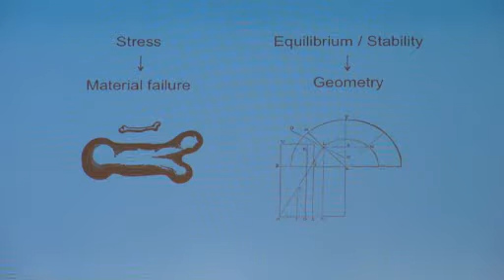The span is about 13 meters, and the thickness goes from 10 centimeters to 15 centimeters. If these numbers don't directly ring a bell, perhaps this image might. It's actually about the same thickness to span ratio as an eggshell, whatever the span is in an egg. Why am I talking about this? Because masonry structures are very different than our typical materials that we use. There's two extreme ways to look at structures and structural materials. One, you can design them for stress. That means you design them for material failure. That is our modern structures.

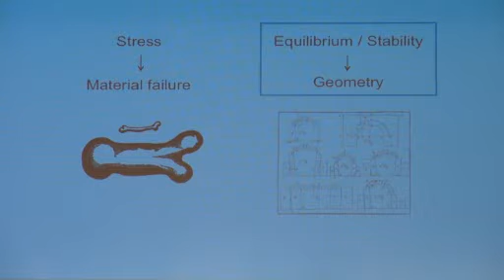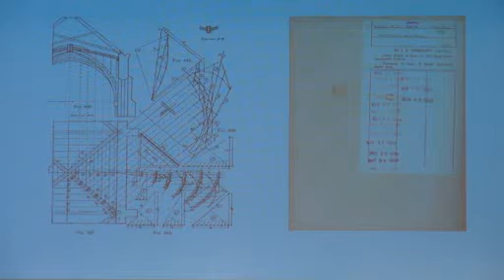But then actually the masonry structures fall in this next category. That is, they actually need to have a good form, because there is nothing holding them together other than just the compression of the flow of forces. So if they don't have a good form, then they will collapse. That is also why in the Middle Ages they did all these spectacular things. My introduction at MIT was here with this book by Wolff, and as you see, it was 42 years ago that anyone touched this book, so it's a very hot topic that I was doing there at MIT, right?

So, but we want to explain these things. Please bear with me. It will make sense why I'm looking at these things and how it fits within the urban stuff, right? But here, first we want to explain these very highly sophisticated shapes. So for this, as a follow-up of my PhD dissertation, we developed these tools that explain this. Okay, but this is digital. We already talked a little bit about digital. You can do whatever you want with digital, so that doesn't mean anything.

So we also do physical tests, and the reason is that it's a property of geometry and not of stress, so these little models actually act exactly the same as a larger structure.

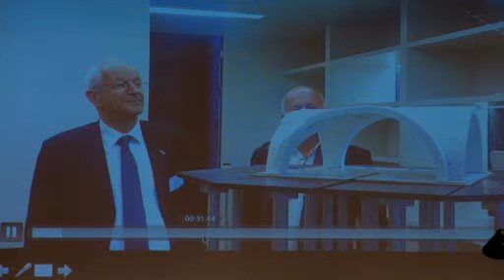Maybe you recognize two of the people on the screen there. That is the president and the vice president of research of ETH. I could catch them for a quick two-minute demo, and this is the result. They seem at least intrigued by what's going on.

What I'm doing is basically modeling and simulating displacements, what happens over time in historic structures. You see I'm sweating profusely because I was a little bit nervous. So that's what happens when you abuse masonry structures too much. They enjoyed it. Everyone loves destruction. Anyway, it was a great moment of fame.

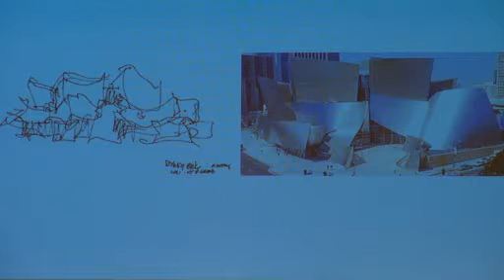Okay, so what is now the link? Unreinforced masonry structures need to have a good form just to stand, otherwise they would collapse. So if we understand this and we learn from these old master builders, the old designers, then we can design new, efficient and expressive structural form. So what does that mean? It's also related to the digital, but I would try to avoid doing it with a lot of material that is not necessary.

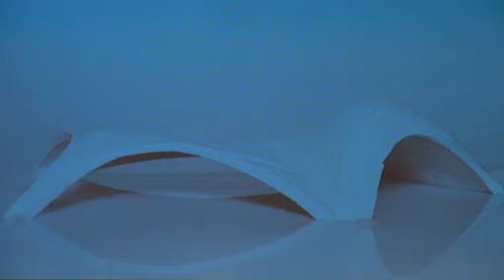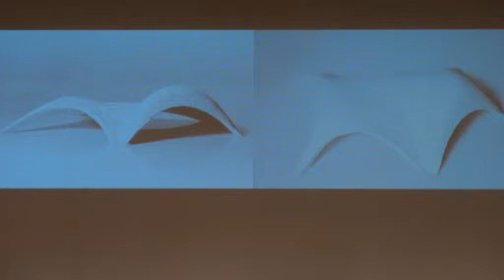So then we do things like this. Again, the little models: this stands without any glue. This was our first little test, and some parts are only 2 millimeters thick. The sound is not running, but that's okay. Again, you need to destroy everything. These models are very important, because part of this is educational, on how to transfer the kind of knowledge that the old masons had.

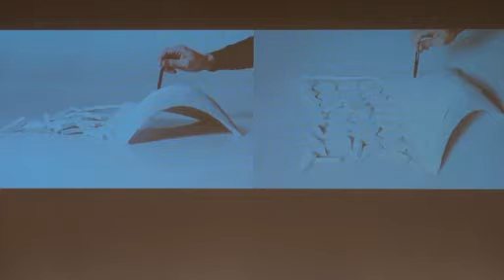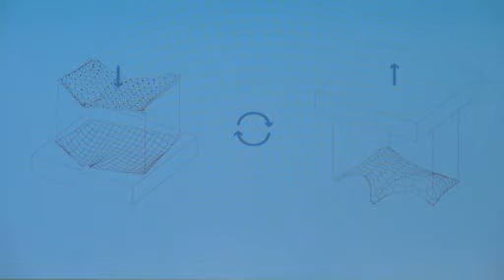You see that these vaults have a lot of capacity to stand. You see also that I'm not cheating with images, that it's really a structural thing, and it's stable until, of course, you do a little bit too much abuse. Anyway, collapsing things is pretty fun. If you wondered how we made this little cake form, we flip it over, it has the supports, and then it stands.

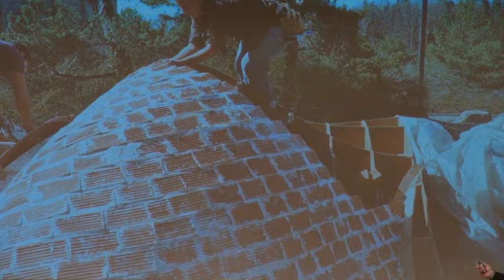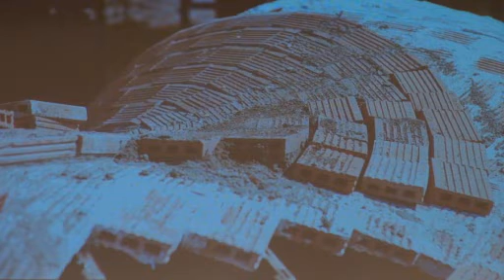So little scale models are fine, and this is getting towards why it becomes relevant. We try these new forms out there directly with traditional techniques. That's Lara Davis; she was a PhD student with me, and now she is with my colleague Dirk Hebel pushing these ideas further. This is built with no formwork, in space. So looking at the past you can do exciting things.

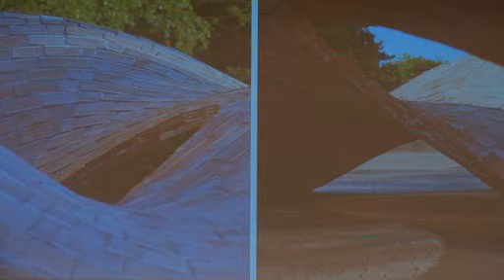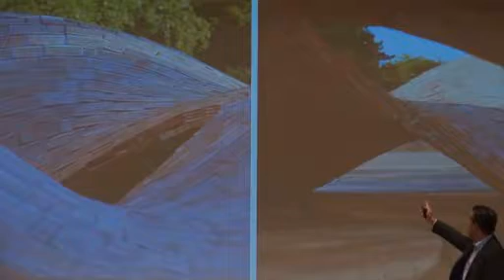This was a little showcase we did. It's not finished, but it shows the interest of understanding these master builders to do something that people do not assume can stand. For example, my colleagues in civil engineering insisted that there had to be tension everywhere. That is not possible, because there is no rebar in the structure.

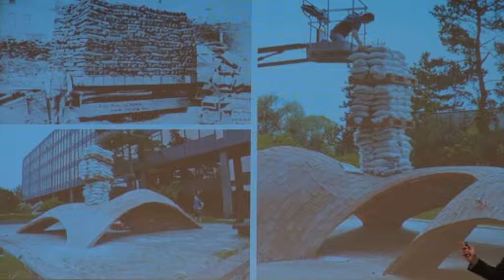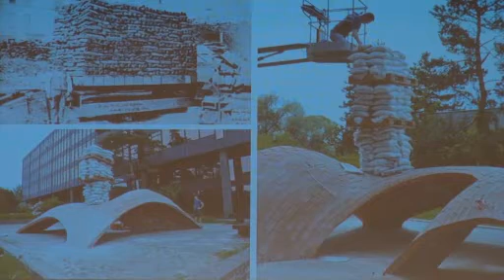To be taken seriously as potential master builders, we needed to do some ghetto testing, so that's why this highly precise Swiss testing situation is going on there. Unfortunately, nothing happened. We hoped for a spectacular collapse. You actually learn the most by making things fail rather than succeed. So we needed to do something else.

So Matthias made digital tools, and he was really excited. It was a good day. Keep going, keep going. That's my overly excited postdoc.

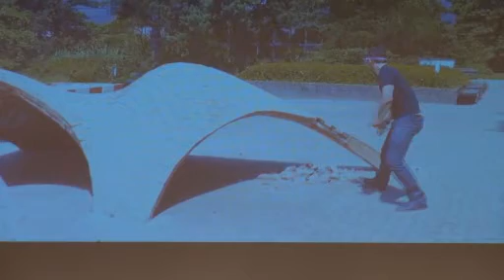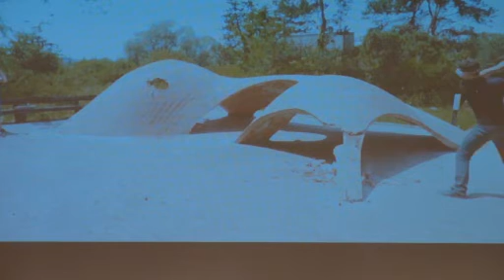You see, he's not used to handle these kind of heavier tools than a mouse, but. Wait. Well, it was an exciting day for all of us, right?

Okay, I will not explain why that is strange, but you get the picture, it had to come down. So the good thing is, again, we learned about this, and so we are really trying to translate this, and this is important.

All right, this is now important for the next thing, because of course you cannot just do all this innovation only digital on your computer. You need to have these grounds. That is the other thing. So I already said unreinforced masonry needs a good structural form to stand.

And then another aspect is not only that we can do new design applications, but if you have a good structural form, so basically you shape your structure where the forces want to go, then the stresses in the material are very low. And so that means that you can either build with very little or very low quality material. And so now we're getting there.

So this is a project that I was fortunate to be part of during my PhD still. Maybe you remember this. It won about every possible sustainable award you can win. It's basically using soil-pressed tiles that are cement stabilized as structural material. That is very surprising because it's not at all a structural material. But because we use good structural form, we can use the local dirt.

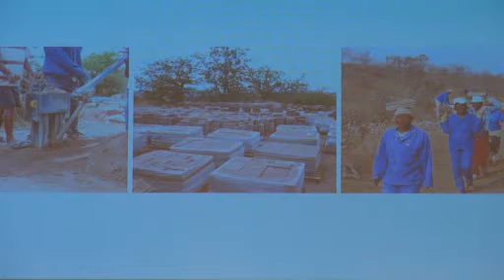So this was in South Africa. It was a poverty relief program. The local people were trained by Michael Ramage, now at University of Cambridge. That is our master mason. You see, not really being sure about what's going on. And then this is actually the very first vault that they did.

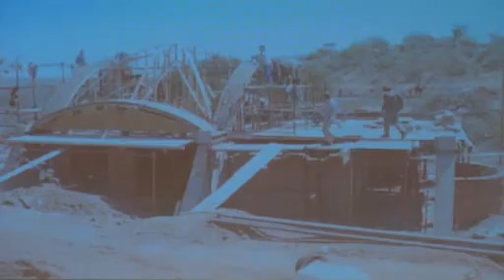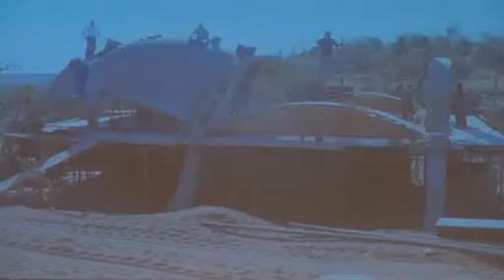So all the wood that you see is only to guide, to make sure that we have the good structural form. We are talking about non-skilled laborers. Two weeks ago, they were farmers, so now they're building this technique that we introduced with a new material from Catalonia, Catalan vaulting. And so these are just basically in dirt, so they are literally also dirt cheap because you just use the local material and the locally available people to work on it. Let me skip the rest.

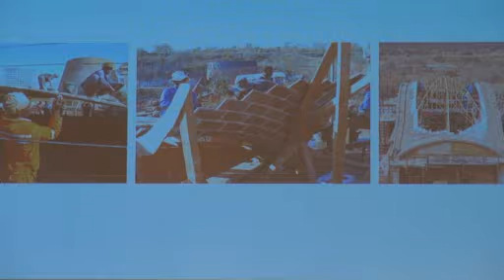All right, a great thing there, and maybe we can share this later, but it's always great to introduce new technologies and the empowerment that comes with it and the pride of learning a new trade, a new skill. So this was the very first vault I built. Just to emphasize again how thin a structure can be if you know where the forces want to go.

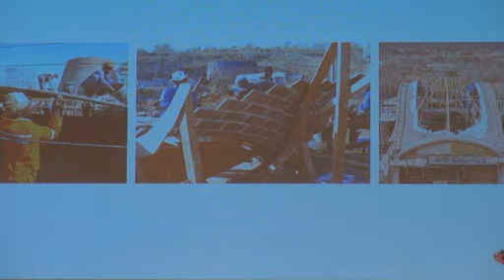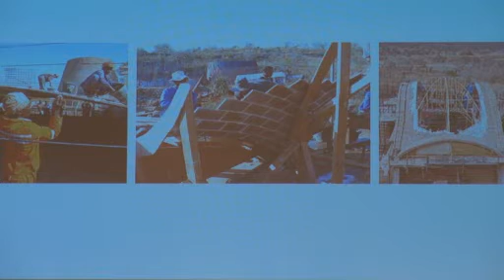And remember, this is just compressed soil, so it's not baked, typical bricks, and that is where we're getting, if you are planning, you are designing new cities, new towns. This was actually initially thought of also as a possible application for the nest town. At a certain point you need to construct it, and so if this really becomes a model for many other places, then this is a chance to really also push these sustainable aspects, these appropriate construction aspects within the project.

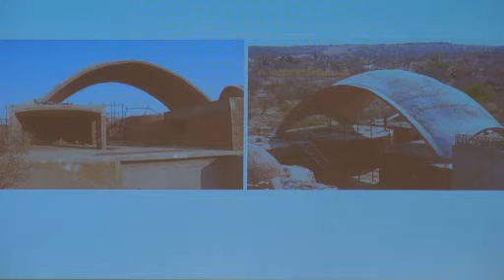To give you a scale again, this is a vault of 18 meters, just standing in dirt. And so the other thing about this, and this is why we tried to introduce it, is that this is really dirt cheap, but it doesn't look cheap, and that is important.

When we presented this, we had several occasions to present this in Ethiopia, they asked me if I would want to live in the solutions that I provided, and I really like this, so I would. If you use local materials, it nicely blends into the landscape.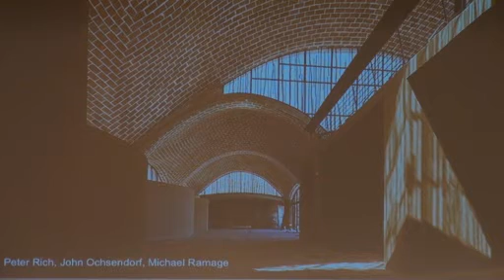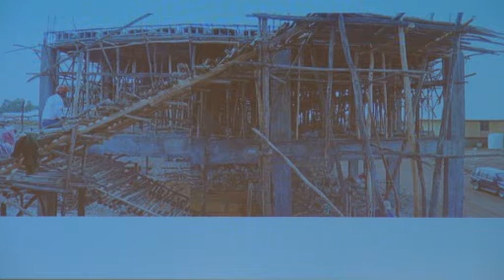Some more images. This was Peter Rich Architects with John Ochsendorf and Michael Ramage. I did the structural engineering of the vaults afterwards. It won World Building of the Year 2009. So if you recognize that that was a building by Frank Gehry, so we beat Frank Gehry in 2009.

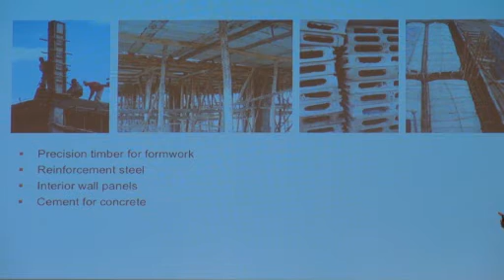Okay, so why could this be relevant? Here, this is now what is called the low-cost housing solution for urban applications in Ethiopia. It is only low cost because there is a lot of subsidy in there, and that is clearly because they are trying to mimic Western models, which we all understand. But many of the things that you need for this, like precision wood, formwork, cement, steel for the reinforcements, all need to be imported, are expensive, and thus perhaps not the best model.

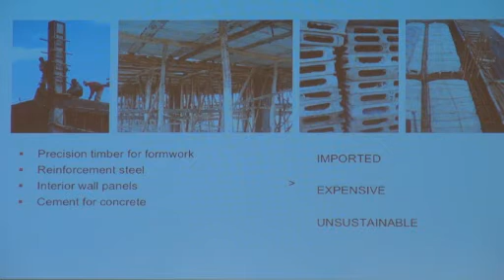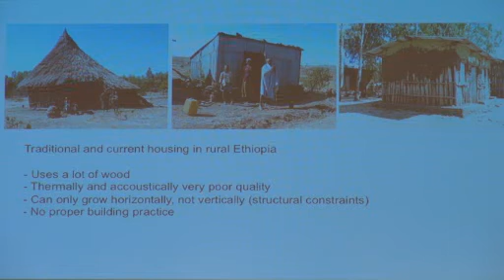Then traditionally we saw already these very nice vernacular traditional things. The use of wood is not in the best way perhaps. This is a modern interpretation. You can imagine that there are all kinds of challenges that we need to assess there.

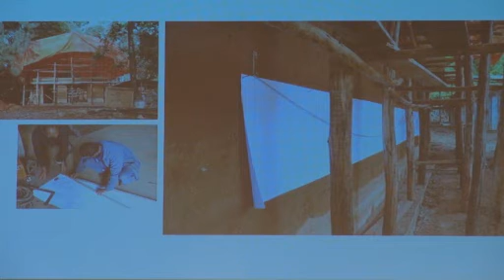So then together with, actually initiated by Dirk Hebel, who will present a little bit more in detail why these kinds of things are important to really work with local materials and what you can do with it, we did this SUDU, this Sustainable Urban Dwelling Unit. Marc Angélil also talked about this. And there you see that this hanging chain is there. This hanging chain is exactly where the compressive forces want to go if you invert it. So to have this there as a physical thing that can be safely reproduced is very important.

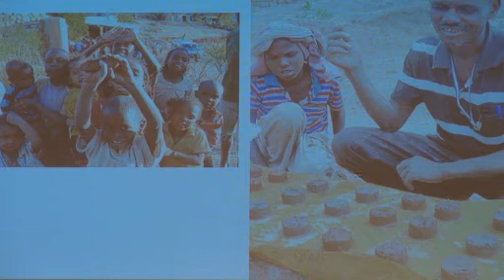The training of the people on all levels, so both vocational, the planners, the architects, the building managers, and even the workers, is very important. We did several of these workshops. Important though, and that is why it then ended up failing in the NESTown project, is that when you want to introduce these kinds of localized ideas, you need to also understand the local problems. And exactly this you will hear about much more tomorrow. And this we did then with some experts, and we assessed that basically on the site in Buranest you cannot use these technologies. And so this is also important.

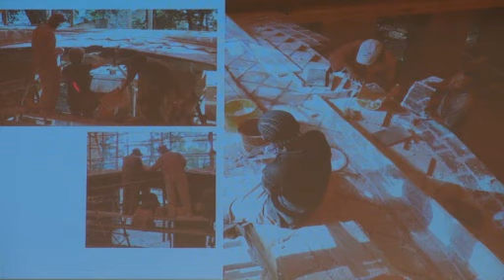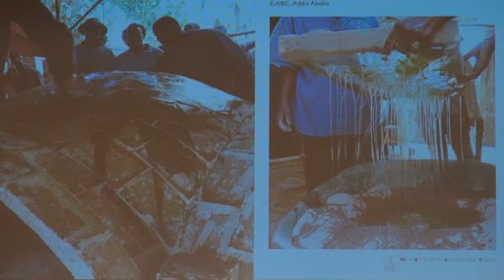So we try to teach the people to be responsible, because if you see the example that we made and we don't explain why it was designed like that, then it is very dangerous, and we are doing non-safe technology transfer. So here again Lara is involved. And so this was then built. This was then also framed as a workshop with ETH Sustainability and ETH North-South. And this was to exchange really between the students from the Institute of Architecture, Building Construction and City Development in Ethiopia and the students of ETH.

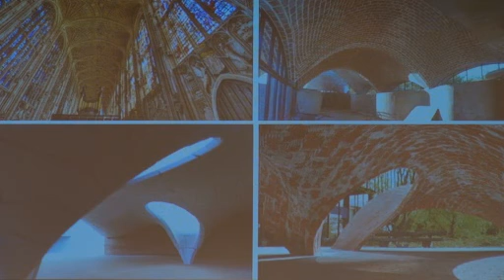So I'm wrapping up. Sorry, I took 5 minutes, but to my excuse, there were some challenges. By looking at the past, you can really learn. We also heard from Christian Schmid that this often goes wrong, particularly in engineering. There is no tradition to look at what things were done before. Engineers nowadays are extremely arrogant. They think that they're at the pinnacle of knowledge, and that is not at all like that.

So luckily, in architecture, in urbanism and all of that, there is this history, this trace, this argumentation. And so I just showed a little bit what I do, that you can even literally in masonry apply this in many exciting ways. But this is also a vehicle to show that you can do exciting and efficient structures with many applications if you understand how they work.